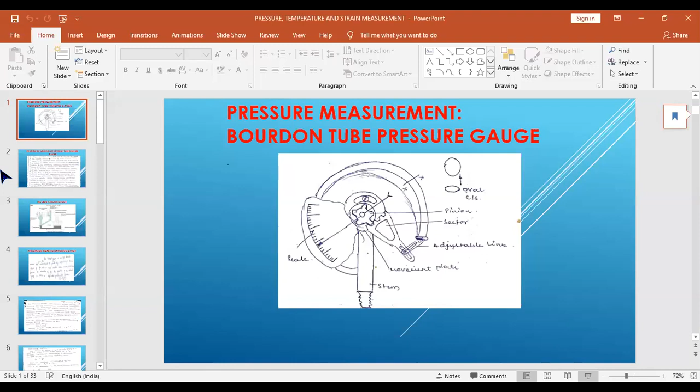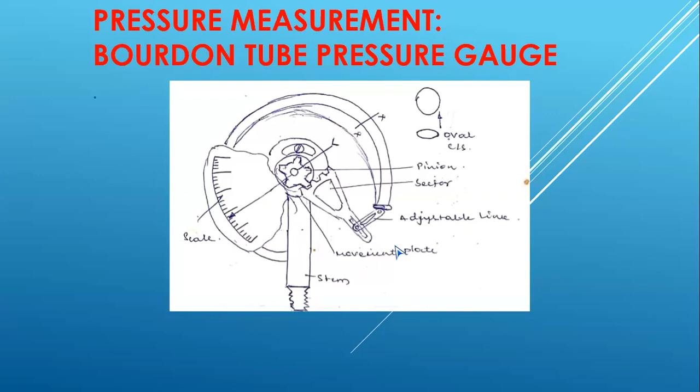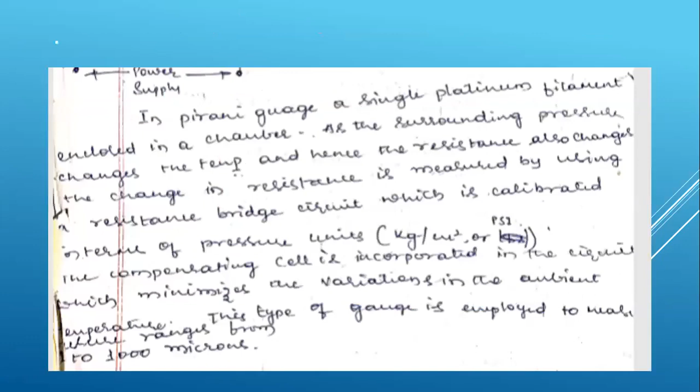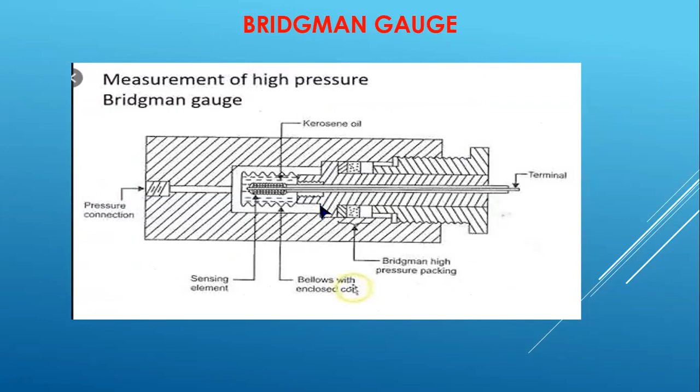In last class, we discussed about the Bourdon tube pressure gauge, used for measurement of pressure for vehicle tires and similar applications. Next, we covered measurement of negative pressure, that is vacuum pressure, using a McLeod gauge, and measurement of low pressure in terms of microns using a Pirani gauge. We also covered measurement of high pressure ranging from 100 kg per centimeter square to 1 lakh kg per centimeter square using a Bridgman gauge. This completes pressure measurement.

Next, we discussed the resistance thermometer and its types. One is made from a silver solid core, and the other from mica. Both the core and mica are covered with sensitive copper winding, and the copper winding is covered with a ceramic insulator. The temperature can be measured from the leads provided at the back side of the resistance thermometer.

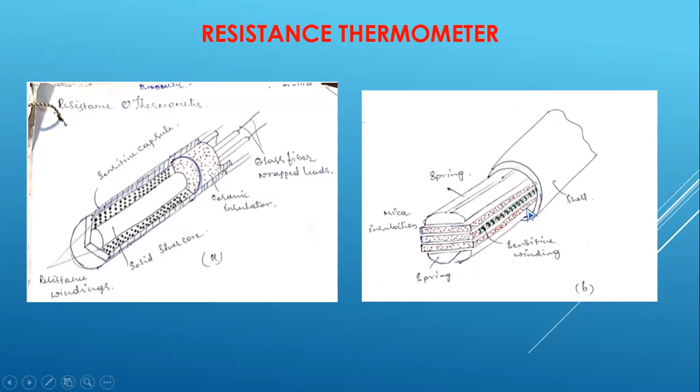The first one is used for measurement of high temperature, ranging from 150 degrees centigrade to 1200 degrees centigrade, and the mica resistance thermometer is used for measurement of low temperature, ranging from 1 to 500 degrees centigrade.

Last class we discussed thermocouples. A thermocouple means there are two types of metals present, and there will be two zones: one is the hot zone, the other is the cold zone. Usually the hot zone is the burning of a candle, or inside the furnace, or inside the oven. This joint is usually placed inside the oven or furnace. The cold junction is placed inside a hole which contains ice cubes, that is nothing but 0 degrees centigrade. So this is the cold zone and this is the hot zone.

Remember the definition of the thermocouple is based on the difference between the metals. This is the copper alloy, that is constantan, and metal B is the silver alloy. The difference in temperature between the hot junction and the cold junction generates an EMF in the circuit, which can be measured using an ordinary galvanometer or millivoltmeter. So this is the thermocouple, used for measurement of temperature. This covers the definition and principle of operation of the thermocouple.

All of you observe here, this is a commercially available thermocouple, used in measurement of steam in boilers, measurement of temperature in furnaces, or measurement of temperature in ovens. So this is the commercially available thermocouple.

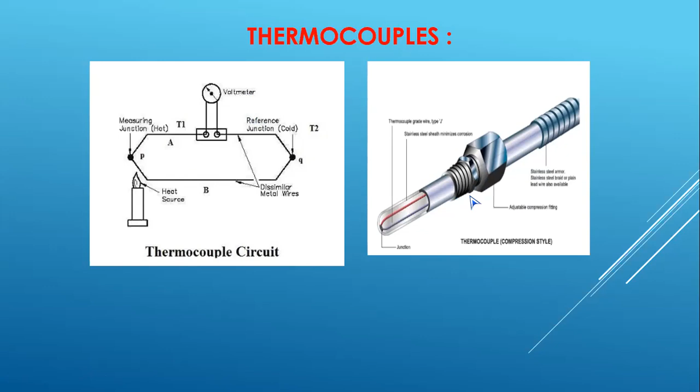There are two laws governed by thermocouples: the law of intermediate metal and the law of intermediate temperature. The net EMF produced in the thermocouple circuit will not change if you insert a third metal in the circuit, or if you insert a third temperature source in the circuit. There is no change in the net EMF produced. That is the law of intermediate metal: if you introduce a third metal into the circuit, the net EMF produced remains the same.

Next, the law of intermediate temperature: suppose you introduce a third junction whose temperature is different from J1 and J2, then the net EMF produced in the circuit remains the same. That is the law of intermediate metal and the law of intermediate temperature.

Please, all of you write down the question: What is a thermocouple? Put a question mark, continue the question: Explain briefly.

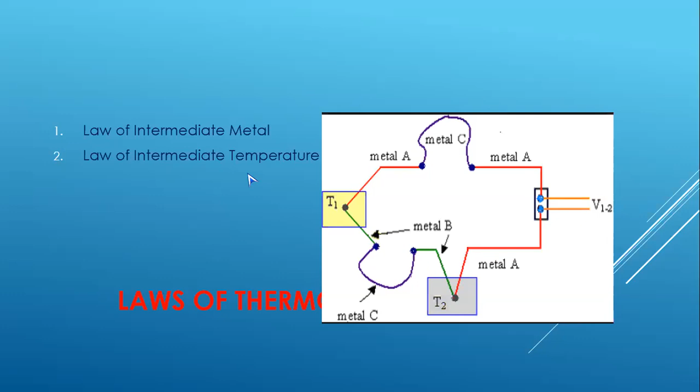Explain briefly the laws of thermocouple. First, write the law of intermediate metal and the law of intermediate temperature. The law of intermediate metal means if you introduce a third metal into the circuit, there is no change in the net EMF produced by the thermocouple circuit. The law of intermediate temperature means if you insert one more junction at a different temperature than J1 and J2, the net EMF produced in the circuit remains the same or will not change. The explanation for these two laws is there; you can go through it and write it down.

Next, come to the point: pyrometry. Pyro is a Greek word meaning fire, so pyrometry means the measurement of fire. Almost all foundries use the optical pyrometer. All of you have seen the Sony webcam or Sony Handycam. Pyrometry means the measurement of fire; pyro means fire, metry means measurement. In Greek, pyrometry means measurement of fire.

So pyrometry is used for measurement of fire, that is, in case of foundries, for measuring the melting temperature of metal inside the furnace. For example, consider cast iron: the melting point of cast iron is 1350 degrees centigrade.

1350 degrees centigrade. Stay away from the furnace, maybe 5 or 10 meters, using an optical pyrometer. In pyrometry, they use two types of pyrometers: one is the optical pyrometer, the other is the total radiation pyrometer. In your syllabus, you have only the optical pyrometer.

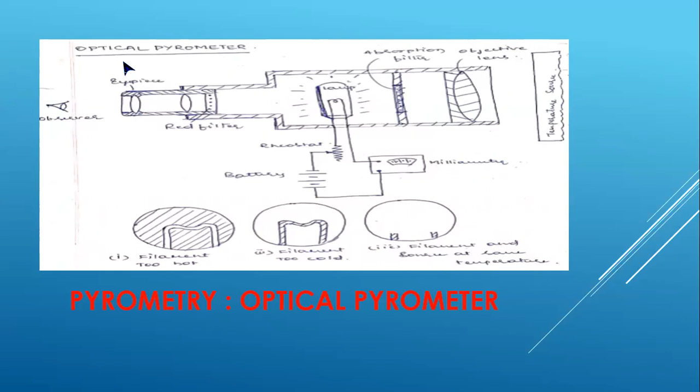Then the filament and the source are at the same temperature - that is, the temperature of the liquid metal is 1350 degrees centigrade, which is the melting point of the cast iron present inside the furnace. The same optical pyrometer is also used in rolling industries where they roll TMT bars and other shafts. This is the explanation for the optical pyrometer.

Next, the measurement of strain. How do you define strain? For example, consider axial strain - the ratio of change in dimension to the original dimension.

Ratio of change in dimension to the original dimension. In this case, epsilon A, the axial strain, is the ratio of change in length of the specimen to the initial length. L2 is the elongated length, L1 is the initial length, so it is L2 minus L1 divided by L1. You can calculate epsilon A, the axial strain.

L1 is the initial length, that is the gauge length. L2 is the final strained length. The ratio of change in length to the initial length gives you the strain. Here the length is in millimeters, and again the length is in millimeters, so they get cancelled - for that reason, strain doesn't have any units.

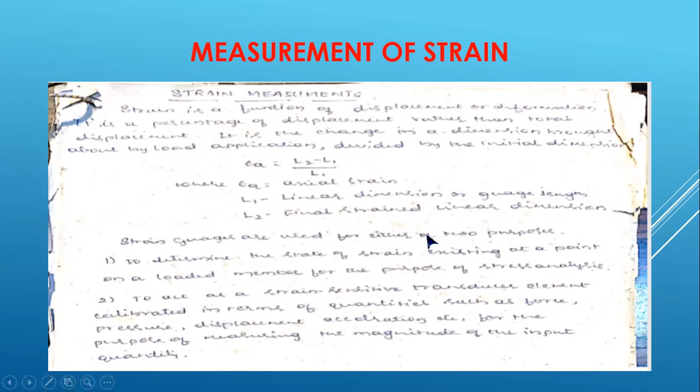Let's come to the point. All of you write down the question.

Derive an expression for metallic electrical resistance strain gauge. Put a question mark. Continue the question: list the applications and limitations.

Measurement of axial strain, measurement of bending strain, measurement of torsional strain - nowadays they are using electrical resistance strain gauge. This is made from copper alloy, or sometimes silver alloy. Remember, the electrical resistance strain gauge is made from copper alloy or silver alloy. All of you observe here.

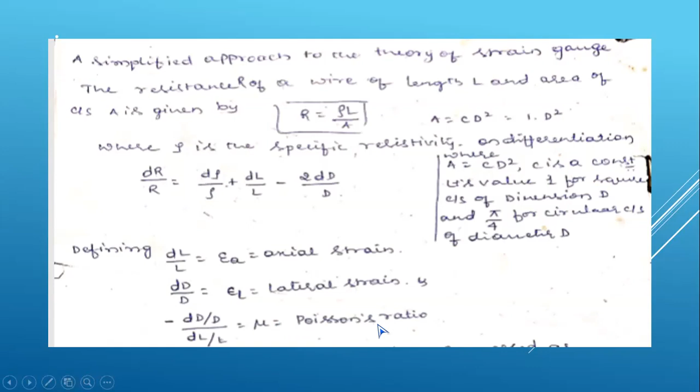Remember, this is very, very important. For all metallic strain gauges, Poisson's ratio is very important, represented by mu.

If you substitute the equation dr by R by dl by L, that is change in resistance to change in length of the conductor, you can define it using 1 plus 2 mu plus d rho by rho divided by dl by L equal to gauge factor. This is the equation used for gauge factor, the change in resistance to the change in length of the conductor.

On simplification, change in resistance dr by R equal to gauge factor multiplied by epsilon A, that is axial strain. The term relating change of resistance to change of length is called gauge factor, also called axial sensitivity.

You can write the gauge factor equation GF equal to 1 plus 2 mu, where mu is the Poisson's ratio. The value of Poisson's ratio for all metals is 0.3. Substituting 0.3 in the gauge factor equation: 1 plus 2 mu equal to 1 plus 2 into 0.3 equal to 1.6. This is the gauge factor of metallic electrical resistance strain gauge.

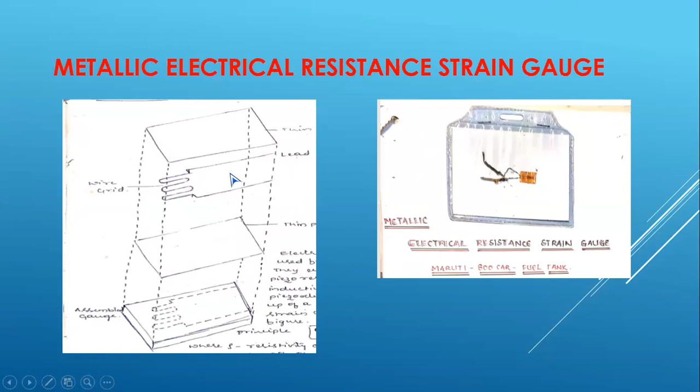For this question, first write this diagram showing the assembling of resistance strain gauge. Then note that this electrical resistance works on the principle R equal to rho L by A.

On differentiation of this equation, you get dR by R and 1 plus 2 mu, that is the relation between resistance, length and axial strain giving the gauge factor. Substitute the value of Poisson's ratio mu equal to 0.3 in this equation, and you get 1.6. The gauge factor for almost all metals and gauges is 1.6.

Ganesh, I made an unmute to all, and you have a test on Saturday, no? Yes sir, I will upload the question paper at 9:10 or 9:15. Okay, yes sir, okay, all the best, be prepared and write it. Okay yes sir. Okay, thank you very much. Now I stop this stage.